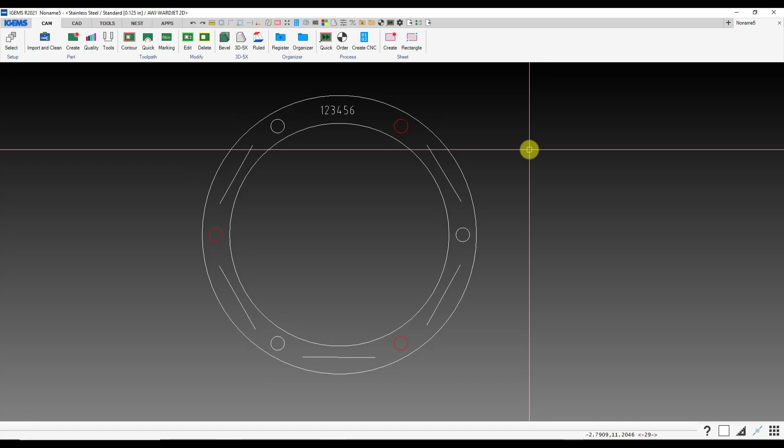One question we get a lot is how to program marking, and this video will cover how to do that in IGEMS. If you're using WARDCAM, there's a separate video on how to do it in WARDCAM.

Let's say a part like this, we want to mark or etch these lines here, maybe mark the part number, and maybe we also want to mark where these circles are, and then everything else we're going to cut. So we'll walk through how to program that.

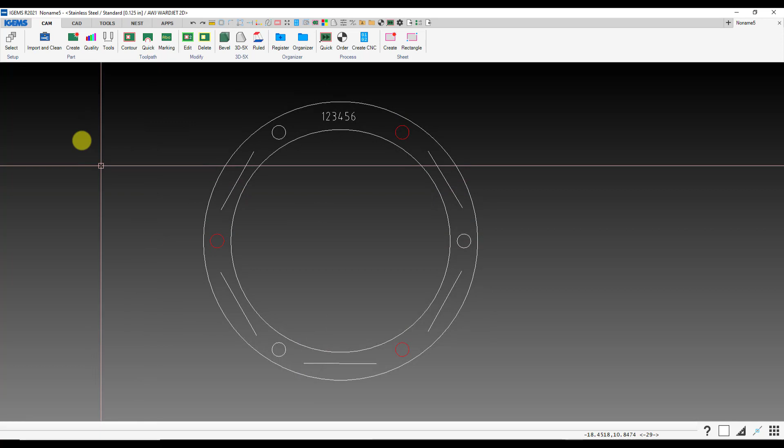First of all, your parameters for your marking would be in your material database. I've got my material selected here. Click on your material edit button. And if you go to the top level of the material, so I'll click on stainless steel, we have this AWJ tab and marking parameters.

First of all, you have this choice here whether you want to use abrasive or not. So if you want a very light mark, you can turn that off and just do water only. And if you use abrasive, then it'll be a bit deeper.

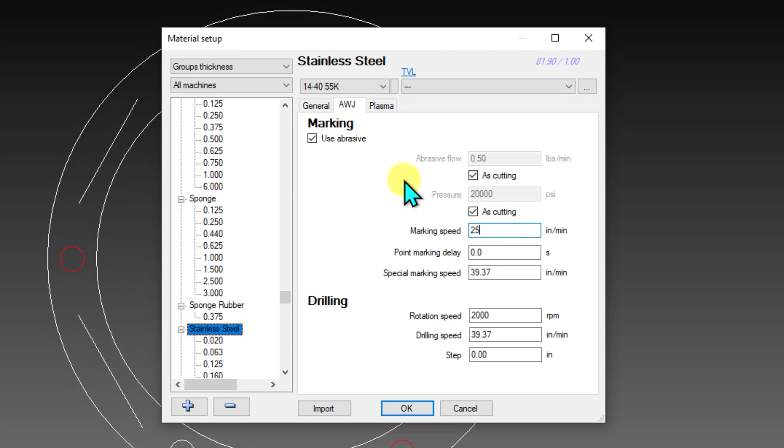And then you've got things like what speed you want to do your marking at. This would be if you're trying to mark a point, how much of a delay there would be there. Special marking speed doesn't apply to what we're doing.

And then up here you've got check boxes about whether you want to do your marking at high pressure, basically the same pressure as you're cutting at, and if you want to use a different abrasive flow. And then depending on our settings in our machine settings, for example, if I uncheck this...

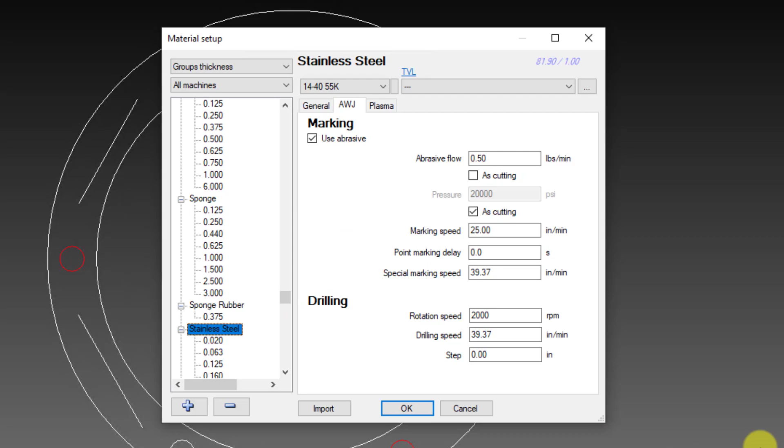If I'm using a standard mini hopper, and if we look at our different mini hoppers, on the left we've got our manual mini hopper. So for people that are cutting mostly metal, then this is usually the mini hopper that you'll get. It has the slider on the front that you'll set to one number most of the time.

But when you are doing your marking, you might want to set this down at a lower number, especially if you're doing it at lower pressure, because when you're marking at lower pressure, say 20,000 psi, you're not able to suck as much abrasive into the cutting head. If you leave it up at the high setting, then you'll probably overwhelm the cutting head and choke it off.

So if you are doing a low pressure marking, you'd want to slide this down to a lower number there. And as far as what the number is, that just depends on the application, how deep of a mark you're trying to get, and that just requires some trial and error.

If you've got the SmartFeed mini hopper, then when the pump goes into low pressure, this will automatically make this wheel spin at a lower rate, letting less abrasive down to the cutting head. And then you could just calibrate that low pressure speed on the mini hopper to be whatever sort of flow rate that you want to do for the marking.

So if you have the mini hopper like on the left, the manual mini hopper, we can put an M00 code into the program. So at the beginning of the program, we'll put M00 to stop the machine, to give the operator the chance to make sure that this is at the low pressure setting for the marking.

And then again, when the pump switches up into high pressure, there'll be another M00 which will stop the machine again with a message, and then that signifies to the operator that he needs to slide this back up to its normal high pressure setting.

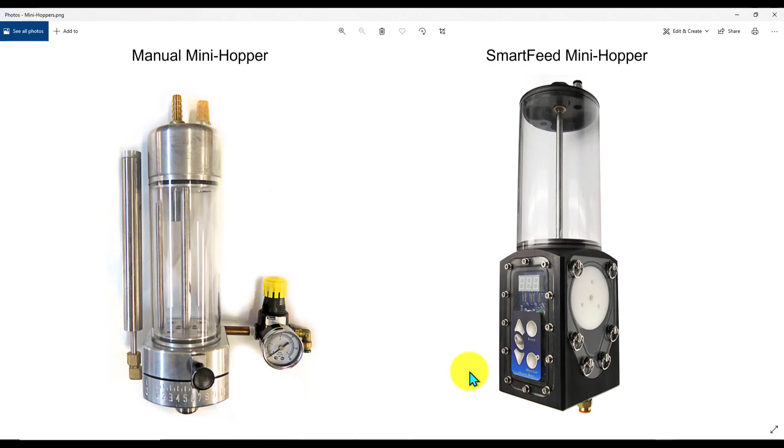So if you do want to do a different abrasive flow rate when you're doing your marking, you would uncheck this box here. Now the number that's in here doesn't control anything on the mini hopper. It will put this number into the CNC files so that the operator can know what to set it at.

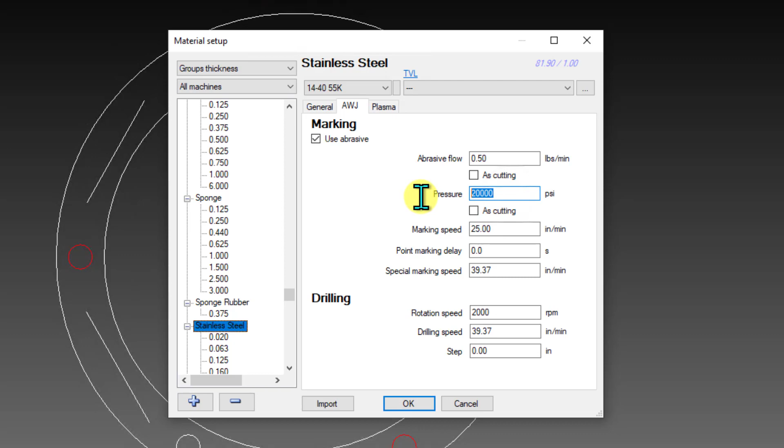And similar thing, if you want to do low pressure marking, you would uncheck this, and again, this doesn't control anything on the pump, but it would just be a signal. We would put that M code into the CNC file to tell the pump to go into low pressure. So for this example, we'll do it with abrasive at lower pressure, and we'll be doing 25 inches a minute.

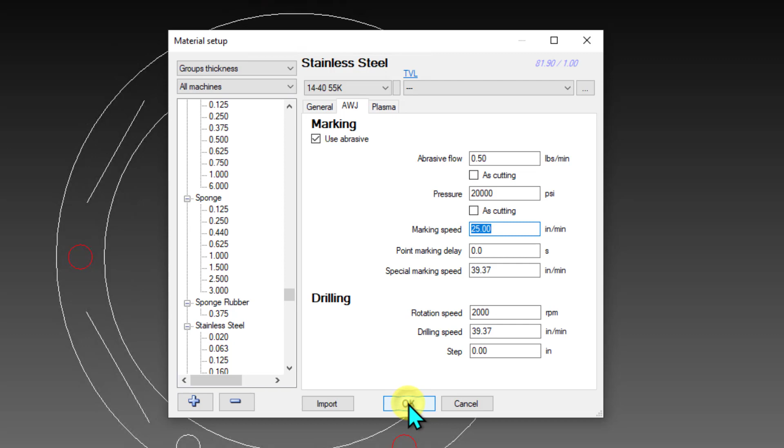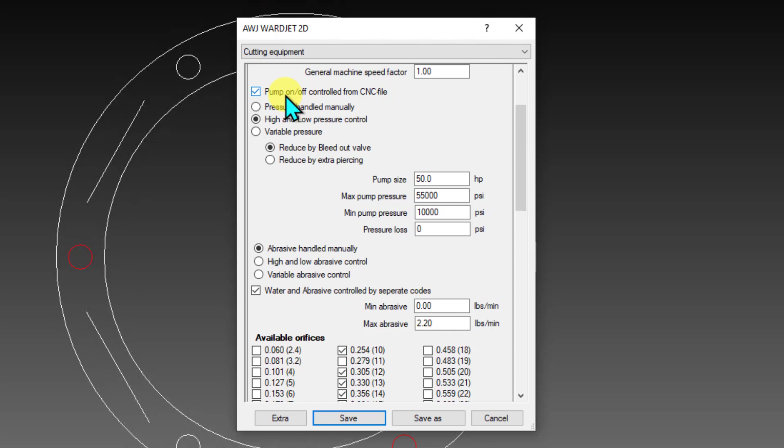Now under machine settings, we just want to check these before we go much further here. If you go down to the cutting equipment area, we have the check boxes and the buttons to tell the IGEMS that we can send codes through the CNC file to turn the pump on and off, and also switch between low and high pressure.

And then down here we've got buttons to signify whether we've got the manual mini hopper or the SmartFeed mini hopper. You'd use the high-low abrasive control button here. We're going to assume that we've got a manual mini hopper, so we'll turn that one on.

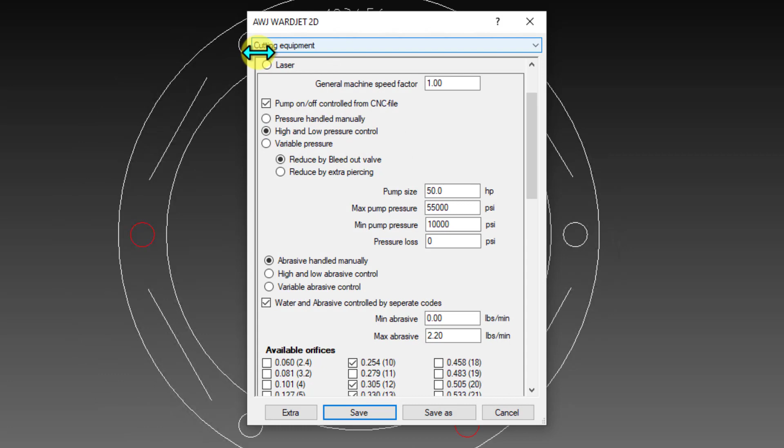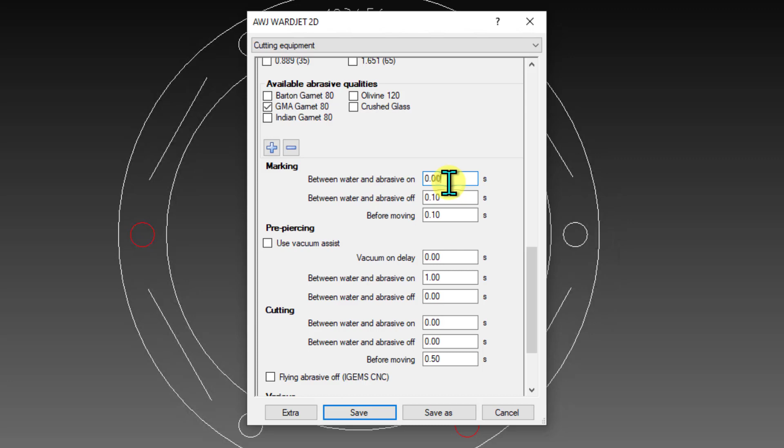Also on this cutting equipment tab, if you scroll down further, at the bottom you've got your delays for marking, so delays between water and abrasive on if you're using the abrasive when you're marking, between water and abrasive off and moving and such. So generally you want these delays to be very short. You don't want the cutting head sitting there very long when it first does its pierce, or at the end when it's shutting off. So very short delays typically for those marking numbers there.

Also, if you scroll down a little bit further, in case you need to adjust them when the pump is going between low and high pressure, these are the numbers that control that. So that's where you can adjust those numbers.

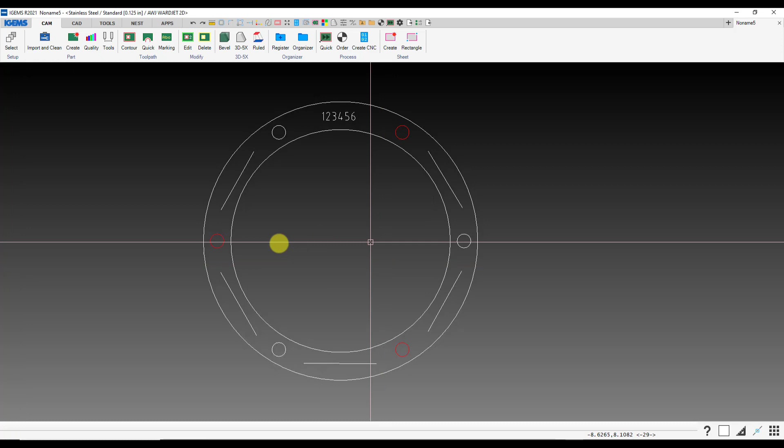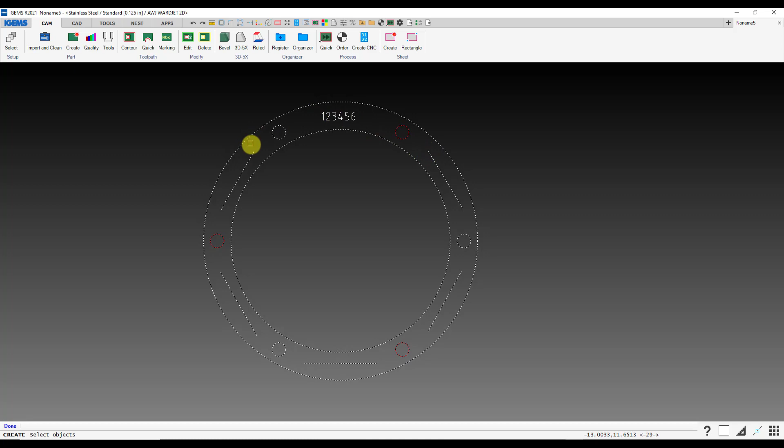Okay, so now let's go ahead and create our part. So when I create, I'm going to drag a box around this, of course. Now this selects everything that's closed contours. It's not selecting these open contours, but we're going to have to select those later as open contours to tell IGEMS that we want to put marking on there. So normally IGEMS assumes that we don't want to do anything with any sort of open contours. If we want to mark these circles, we want to deselect them at this point. So I hold down my Shift key and I click on these, I deselect these, and then in the next window here we will select those and then be able to apply marking to those circles.

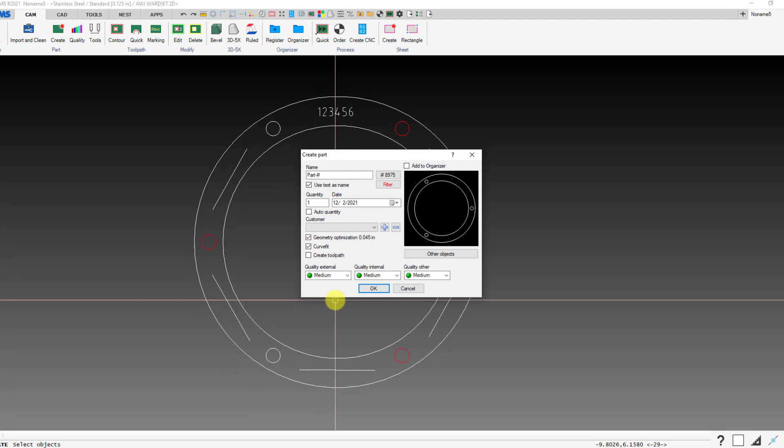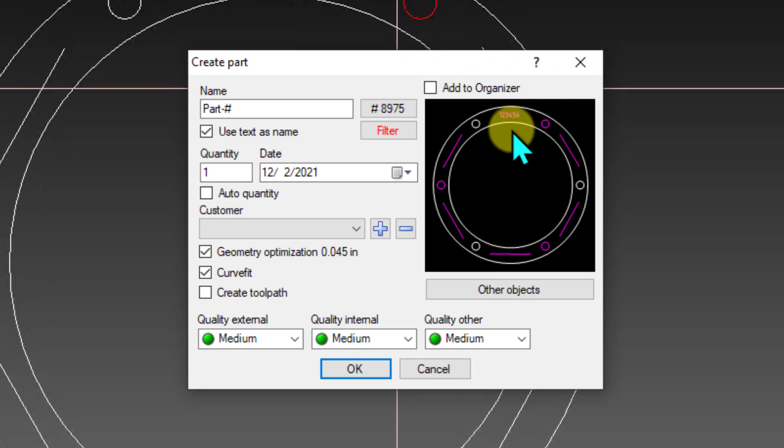So we hit enter and we have our preview box here and we see all the things that we want to cut. And then if I choose other objects, I can drag a box around this, left click, drag, left click. So you see it selects everything else that I hadn't selected before. Hit enter again, brings us back to here, and in the preview window you can see these other entities in the magenta color there. So click on OK, and now we can use our marking.

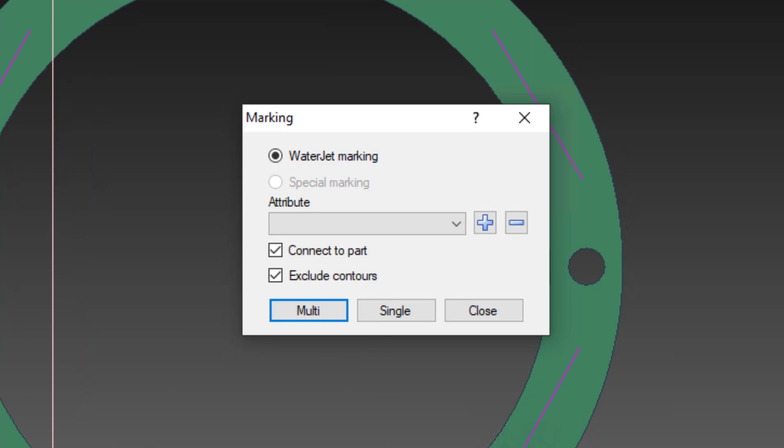So up here on our CAM tab, under the toolpath area, we've got the marking option. If I click on multi, I can just drag a box around this and IGEMS will determine the best path between all those cuts. If I prefer, I can click on single and I can individually click on these in the order that I want to do it. And if I have a preference on which end of a line I want to start at, I would use the single, and you can click on the end of the line that you want to start your marking from.

In this case here, I'm just going to do multi, and we'll just drag a box around everything. Highlights in yellow what it's going to be choosing for the marking, hit enter, and now we've got our marking toolpath on there. And then from there, of course, we can do our contour button to add the rest of our cuts, our toolpath for the actual cutting.

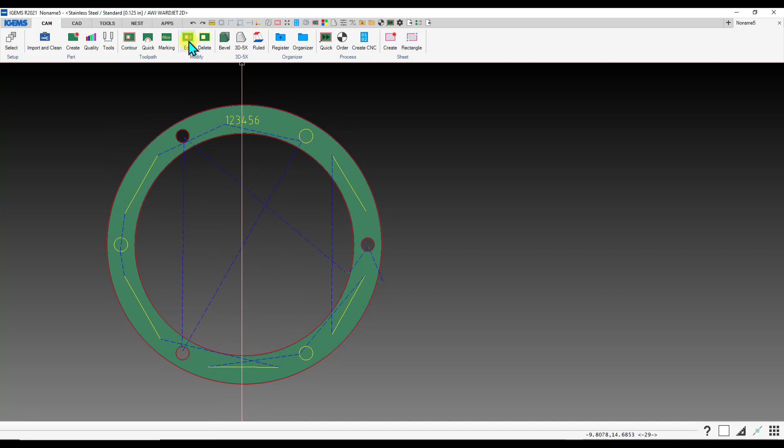And if I go into my edit command here, click somewhere on the perimeter of the parts, brings this up. So you can go through here. If you need to reorder the markings, you can use this box here. So it finishes all the marking and then does the cutting. And if you're happy with all that, we'll just go ahead and take a look at the code.

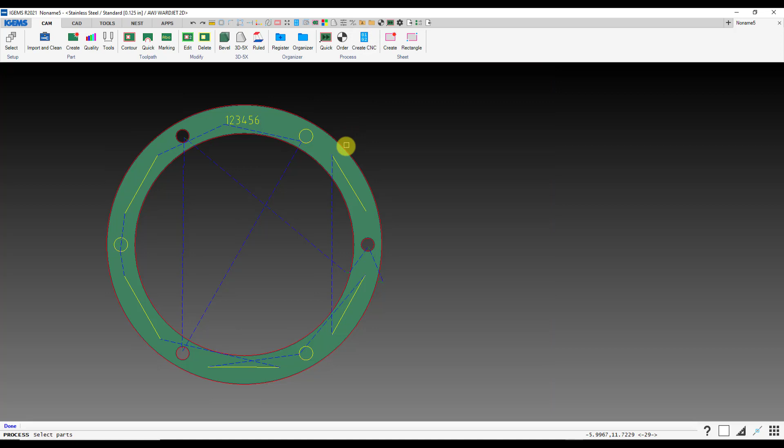So just want to check, if you haven't done it before, go into settings, and under strategy, under the various tab, you want to make sure that skip pressure changes is either set to no or no but ask, and skip abrasive flow changes is also set to either no or no but ask. Then in that way it'll put the M00 codes in there when it sees those abrasive changes.

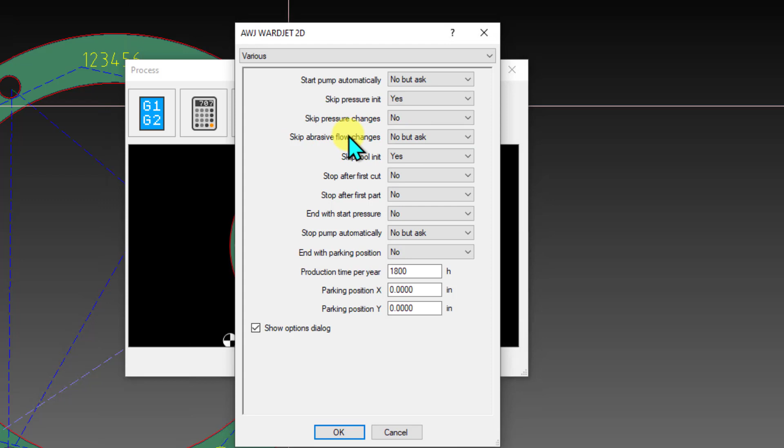So we'll just do the 2D preview. So we've got our checkbox here. We're not going to skip abrasive flow changes, so I'm not going to check that. And here at the beginning of the program, we've got our M100.02, tell the pump to go into low pressure. You can see the comment here, start of marking. We got our delay to go to low pressure.

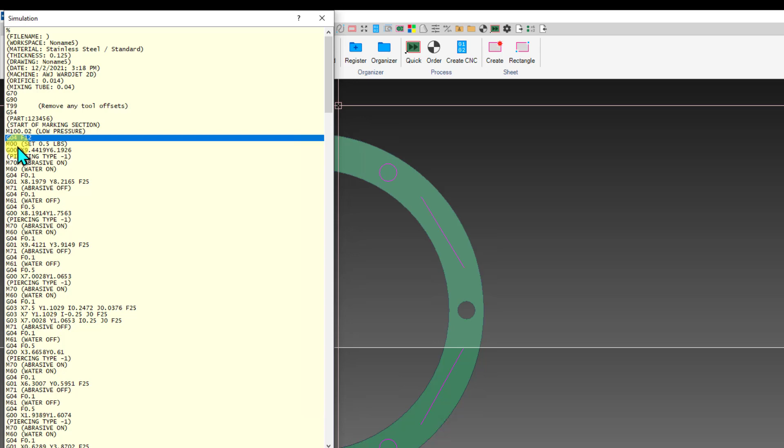And then we have an M00, and you see in the parentheses there's a comment, set 0.5 pounds. So that again would signal the operator to move that slider to the appropriate setting for the marking. And then it's going to go ahead and do the marking, and we can see the feed rate here, 25 inches a minute for the marking.

And then we've got the code here now, end of the marking section, start of cutting section. M101.02 puts the pump into high pressure. Again, there's the delay to go to high pressure. M00 triggers the operator to then move that slider back to the high pressure setting on the mini hopper, and then we'll continue on with the cutting from there.